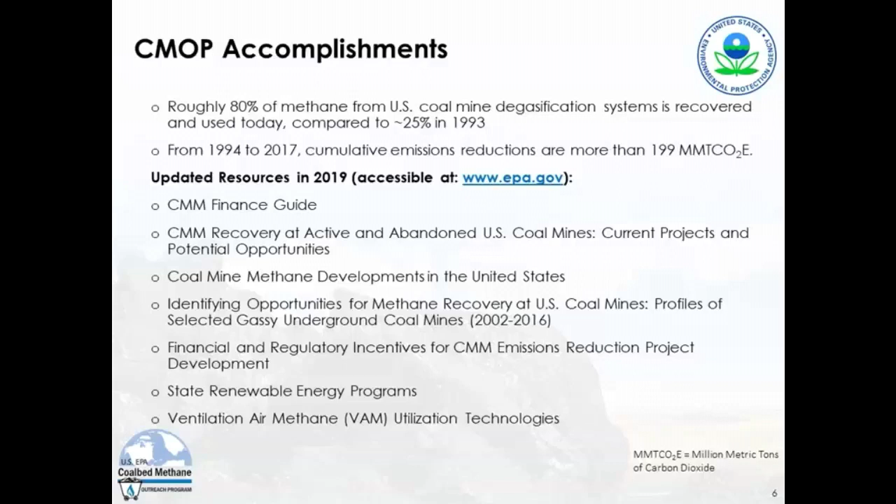The source of AMM is from abandoned mines. As mines mature and coal seams are mined out, mines might be closed or abandoned, but it's possible that even after active mining stops, the coal mine methane will continue to seep out through vent holes or natural fissures and cracks in the ground. So we'll be discussing AMM today, but please reach out to us if you have questions about any of these other sources of CMM.

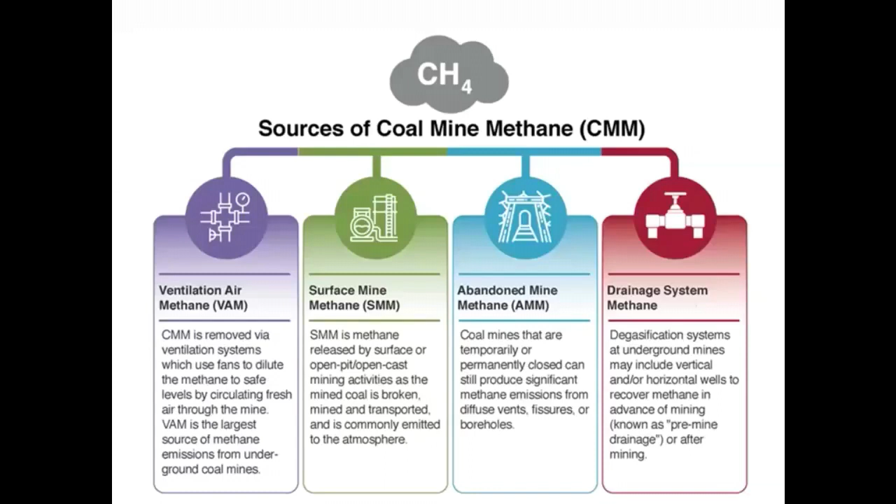Next, I'd like to introduce our first speaker. Many of you might already know Michael Cote from Ruby Canyon Engineering. He's an experienced CMM and AMM professional. He's worked with our program on various aspects of AMM emissions, estimations, and project development since 2000, almost 20 years. He was one of the principal authors of EPA's AMM emissions estimation methodology in 2004, which is a methodology used by the Intergovernmental Panel on Climate Change, or IPCC, and EPA's current national greenhouse gas inventory.

In 2005, Michael co-founded Ruby Canyon Engineering, whose services primarily target methane to energy offset projects at coal mines, landfills, and livestock operations. He's also a partner in Global Carbon Strategies, a company that developed and is currently operating an abandoned mine methane project at the West Ridge mine in Utah. He received his Bachelor of Science in Environmental Science and Management from Colorado Mesa University in 1997. Thank you, Mike.

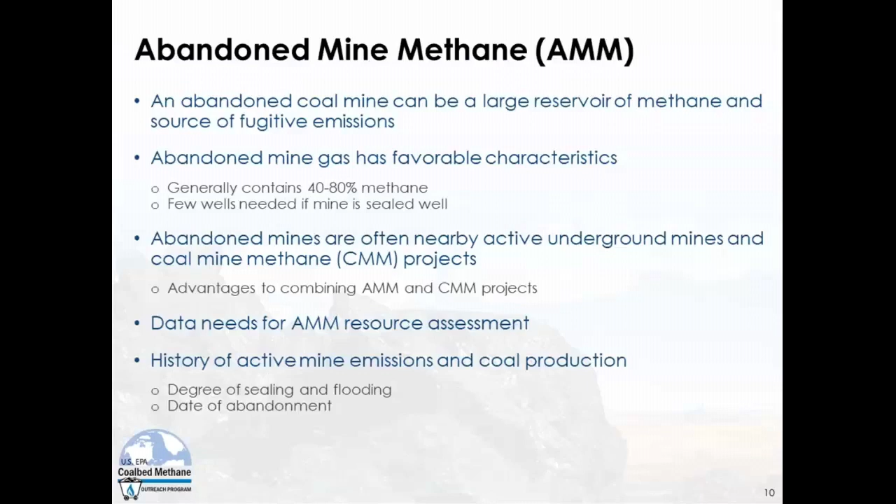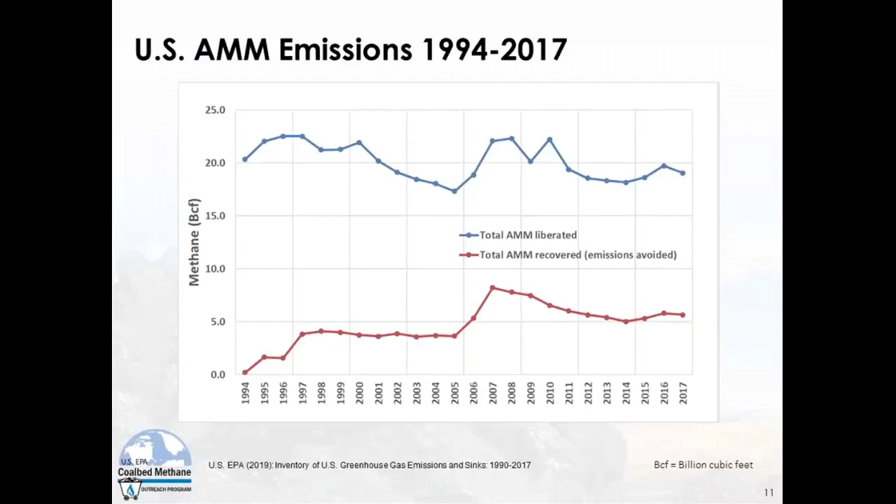There's a history of U.S. AMM emissions since 1994. You can see here that the resource has ranged somewhere between 18 and 23 BCF, looking at the top blue line. It's been about 18 BCF for the past 5 or 6 years. Similarly, the recovery operations in the red line below have been around 6 BCF of recovery.

There actually are about 10,000 abandoned underground mines in the U.S., but as you know, many of the coal mines in the U.S. are not gassy. And so we're really just focused on a subset of that population, just the gassy mines. And so currently there's maybe close to 550 abandoned mines in the U.S. right now that are in the database and are included in the AMM inventory that the EPA conducts.

And if we look at that, I divided it into thirds, and the top third of 6 BCF of recovery is currently going on from 45 mines, and it's actually 20 projects, so many of the projects have 2 or 3 mines associated with them. This one photo that you see here, the Corinth project in Illinois, has more than a dozen mines associated with it.

EPA did a study a couple of years ago to try to high grade the remaining mines, and as we'll see later, probably about the top 100 mines would account for the next 6 BCF of gas, and then finally the bottom tier 6 BCF is probably spread across almost 400 mines or so. So the economic viability of that will be very site specific, depending on the proximity to an end user, or if it's co-located with active mines, then it can supplement.

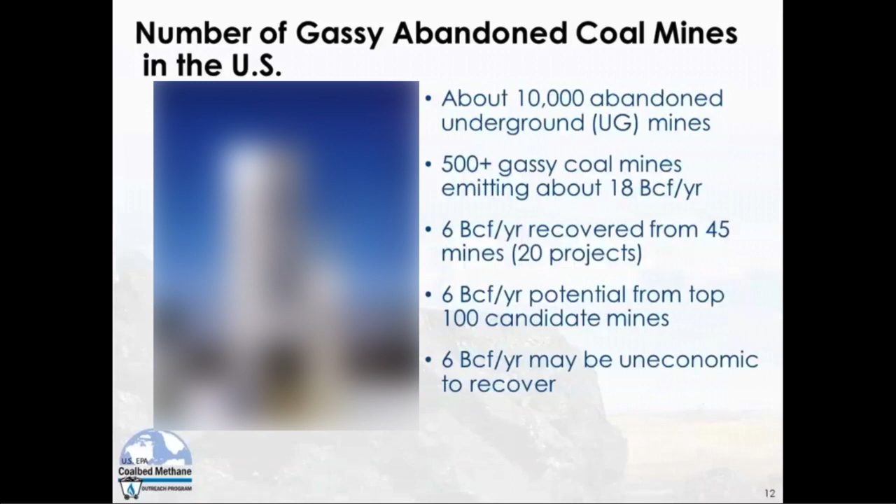Taking another look at the utilization from those 45 mines where methane is currently being recovered. Gas pipeline sales by far represents about 3/4 of the utilization. I think what we've seen is a lot of coal mine methane pipeline projects that have transitioned to AMM. As I mentioned earlier, in Appalachia, that has been the case. We have one big power project operating right now, but it actually accounts for 5 mines. And also, we've seen in the past several of the projects have sort of flip-flopped between gas sales and electric power, depending on the year and the time.

And finally, industrial end use, direct use. We have a couple of projects, and there may be more of these. Sometimes the very small-scale industrial use projects don't show up on the radar. And so you can see that while flaring is sometimes associated with these projects, all of these mines have end utilization.

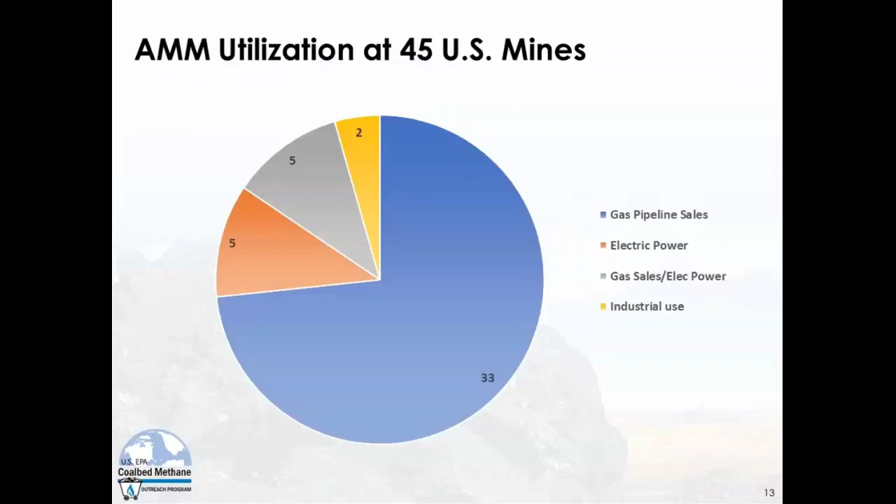Here's a U.S. map, just identifying the mines that we consider to be at least worth a look at, the ones that are estimated to be over 200 MCF a day. We consider that kind of a minimum level of economic viability. And you can see here there's several clusters. Appalachia is the primary spot. Northern Appalachia, there in southwest Pennsylvania, is a rather good spot. You can see a lot of identified sites there. Central Appalachia as well. The Pocahontas Basin also has a large number of mines concentrated there.

Other areas further west, you can see southern Illinois and right on the Indiana border. There is a collection of mines in the Herrin and Springfield seams there that have proven to be very viable. And then you can see in the west, there's a few mines in Colorado and Utah.

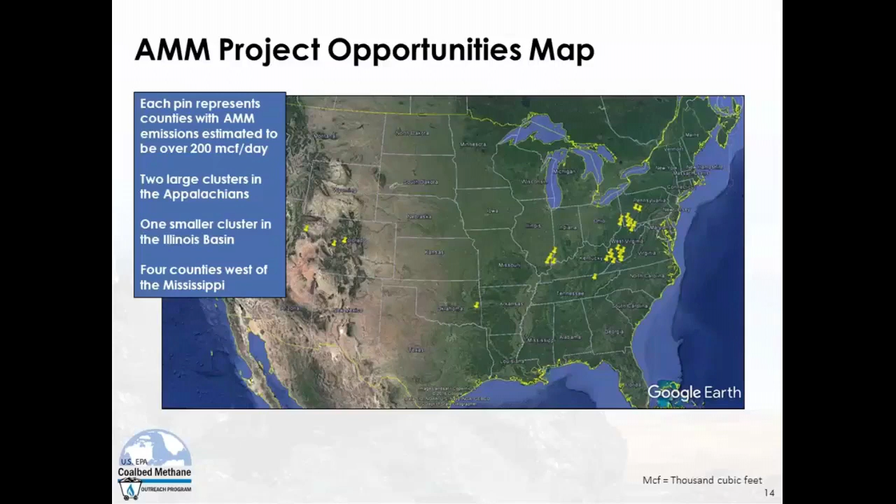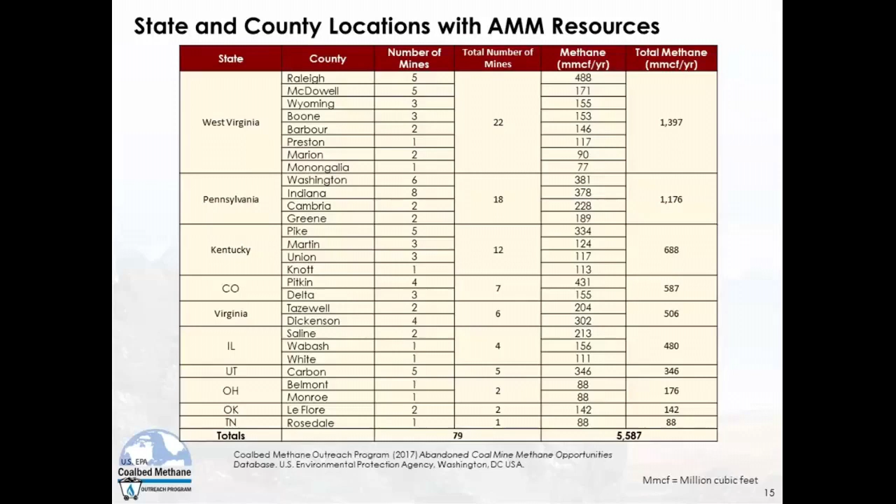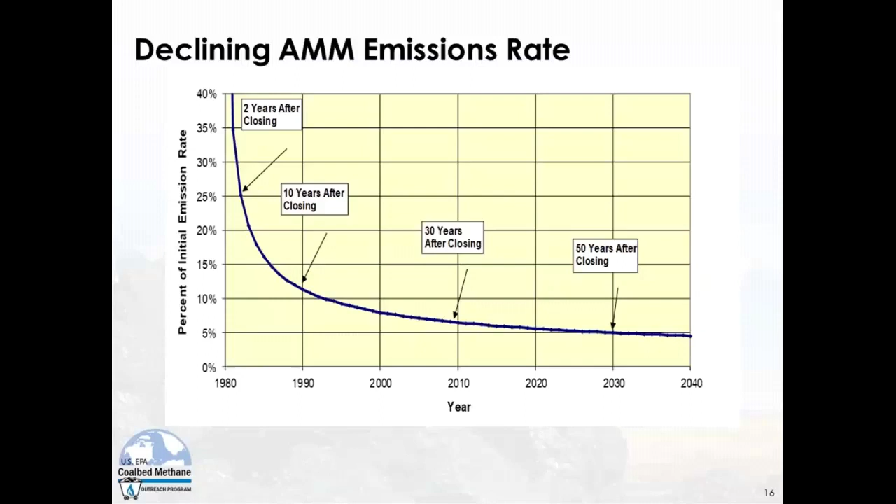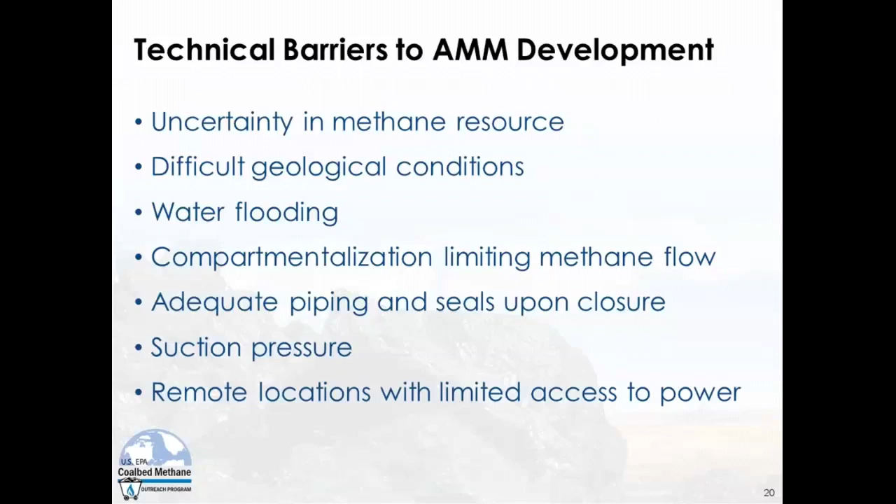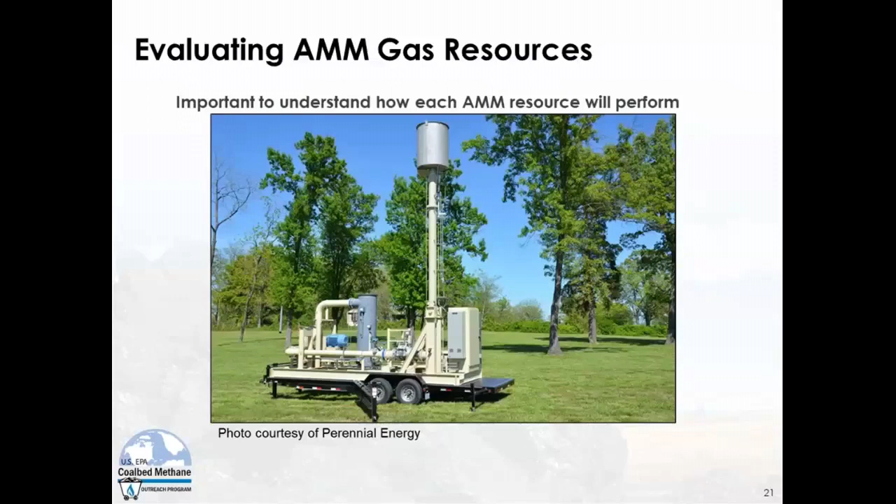Well, evaluating the decline curve is one thing that sort of gets you started, but really evaluating the resource in the field is a much better way to go to understand how the mine behaves. And so getting some kind of a temporary flare and blower to go on some existing wells, if they're there, helps a lot in understanding the behavior of the mine. So flow testing, pressure testing, flowing the mine and shutting it in and watching pressure build up. There's a variety of ways that can help an engineer do a better gas resource analysis.

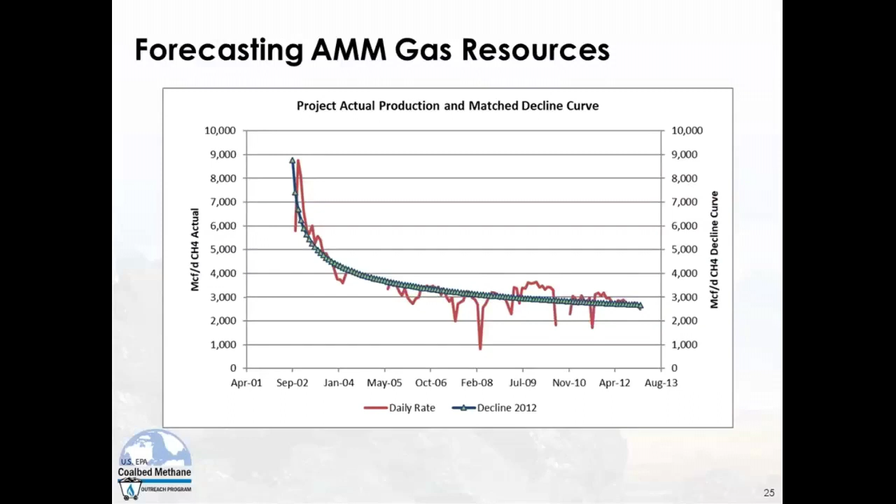When you compare abandoned mine projects to CMM projects, you have to keep in mind that the size and scale is quite different. We're talking about much smaller projects that are 10 to 25% of the size of a CMM project. It's something to take into consideration from the outset. There's nothing you can do technically to overcome this. Utilization technologies are pretty much the same because we're talking about medium quality gas.

One of the advantages of abandoned mine projects is that you're not having to interface with the coal mine itself. The activities of coal mines, in terms of the amount of gas that they're emitting from gob wells and other kinds of wells, are all based on safety considerations and not on delivering a certain amount of gas to your project for economic reasons.

Gas ownership can change after a mine is abandoned. A coal mine may be able to operate a coal mine methane project with or without a gas lease, depending on the state and the location that you're at.

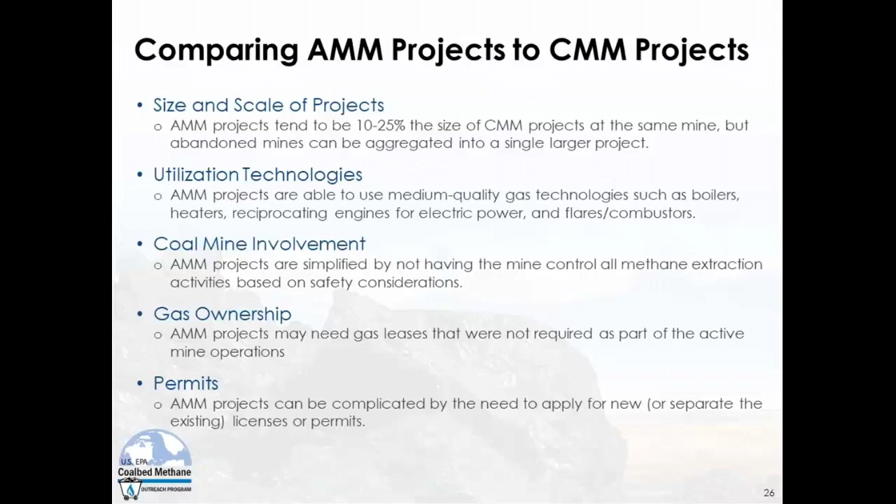Whereas if you're in an abandoned mine situation, the gas lease will be necessary. Also, permitting is similar. A lot of times the coal mines will have all of their permits under one umbrella permit, and they're able to do things with blowers and satellite sites. When you go to apply for your permit for your one location, you'll find that the blowers and IC engines will have some NOx and CO situations, so permitting is not a simple step, and this should not be overlooked as it could be quite costly.

So I guess in summary, what we're showing is that AMM projects offer a little different set of opportunities as well as some different challenges than CMM projects. And one thing that we didn't talk about too much is that preparing an active mine for methane extraction can be quite beneficial. Depending on how compartmentalized the mine is or what a mine can do, thinking about helping out methane extraction once they leave can be very important.

So if you're in early and you're cooperating with the mine right at that time, that's definitely a consideration to have. Also, performing some kind of resource evaluation at the beginning of the project and throughout the project, and updating that, is really important to understanding the behavior of your mine.

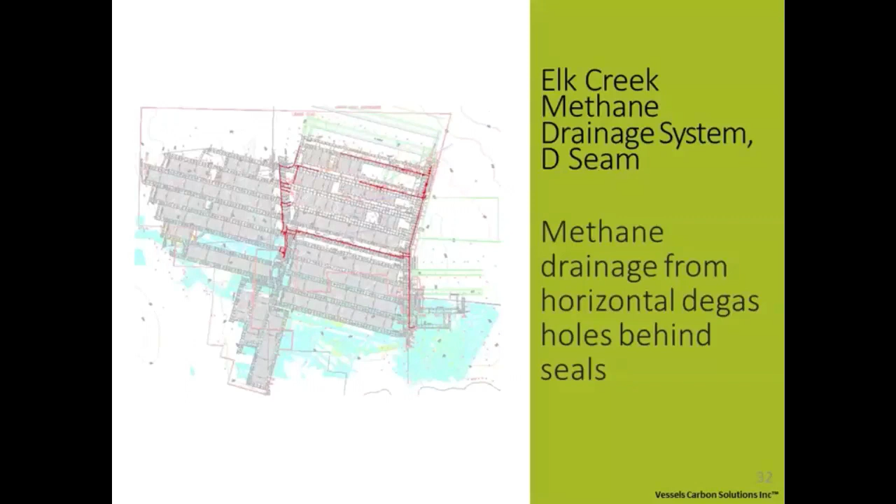They are currently closed. This is just a picture of the methane drainage system, and we are attempting to collect methane from more than one point in that drainage system, but currently we are only able to collect from one of the 2 points we'd like to, and I'll talk a little more about that later.

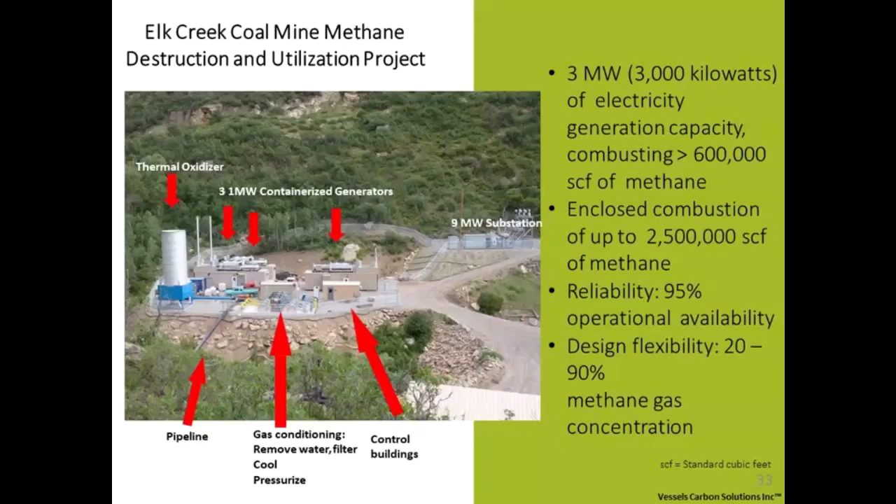This is a picture of our facility. It's actually quite small. We have 3 gen sets that can each generate 1 megawatt of electricity, and then we have a large thermal oxidizer. And the thermal oxidizer is currently running intermittently because we are at a point in production and along the decline curve where we're no longer running full time.

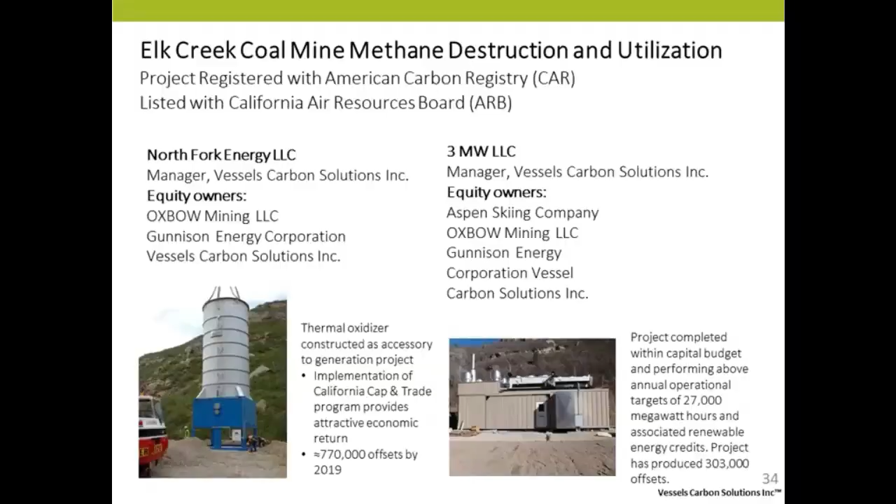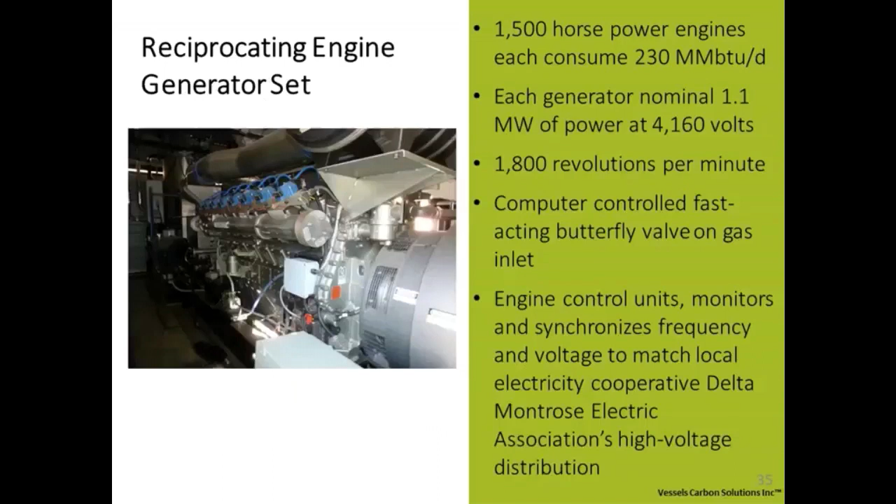The project scoping required an enormous amount of partnerships with different parties, and also required working with carbon registries so that we could produce carbon offsets. Currently, our thermal oxidizer has produced over 700,000 offsets, and the generators have produced over 300,000. The engines are pretty basic standard technologies, and they're able to run off a very low purity of methane.

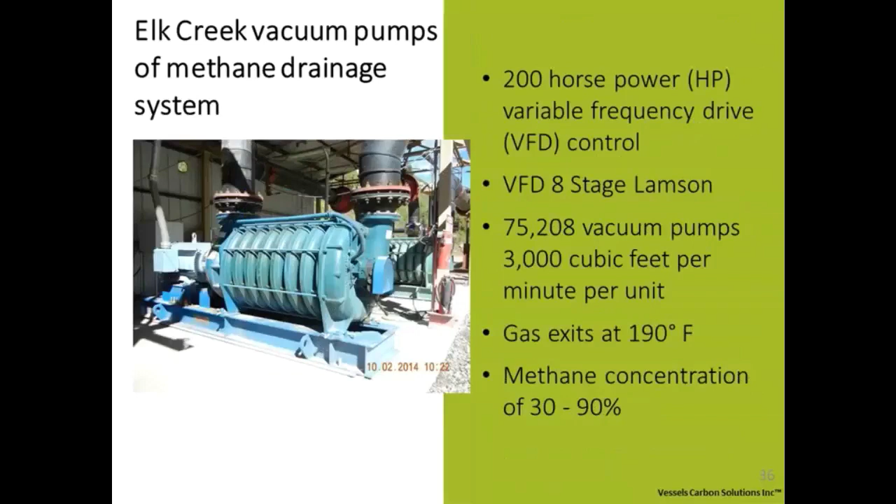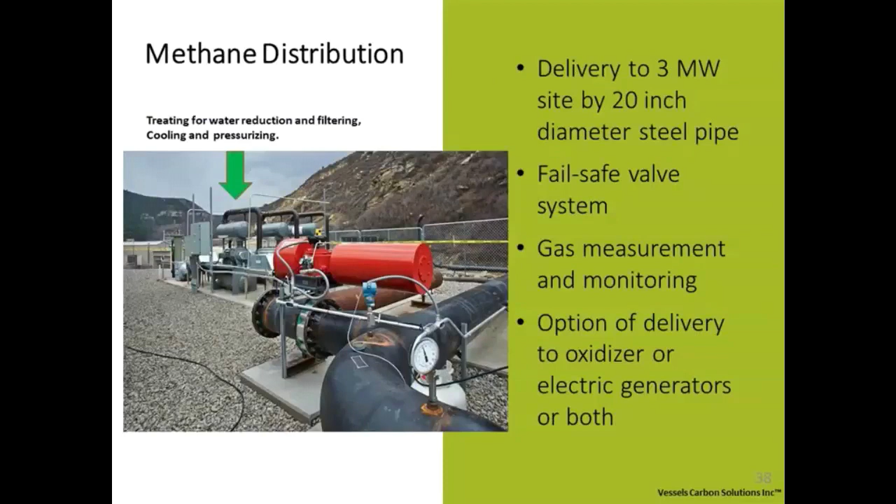This is the compressor system where we get the methane out of the mine, and it is transported across a small ravine to our facility through a pipeline. When it reaches our facility, we have some pretty nominal processes to clean the gas. We knock some of the heavy particulates out of the gas flow, and then we also knock some moisture out. However, gas that goes to the flare does not need any of this treatment.

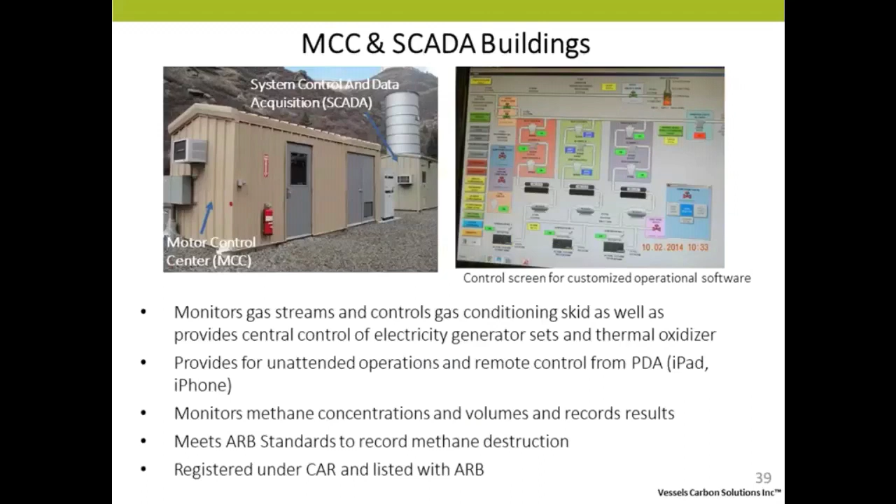The flared gas and the gas for the generators have to be managed by a sophisticated SCADA system, which stands for System Control and Data Acquisition. And this is how we make sure that we are also measuring our gas content and flow so we can secure carbon offsets.

Unfortunately, we're not able to produce the full amount of methane as indicated by the decline curve that Michael mentioned earlier. And the problem is we are sucking too much air in from atmosphere. The reason why we know this is because we've detected oxygen in the gas streams, and oxygen bonds with coal to become CO2 in a very short period of time.

So when we're detecting oxygen coming all the way to our facility, that means that there's a very large amount of oxygen coming in from the atmosphere, so much so that some of the oxygen is still reaching our facility, and this is preventing us from operating at full capacity.

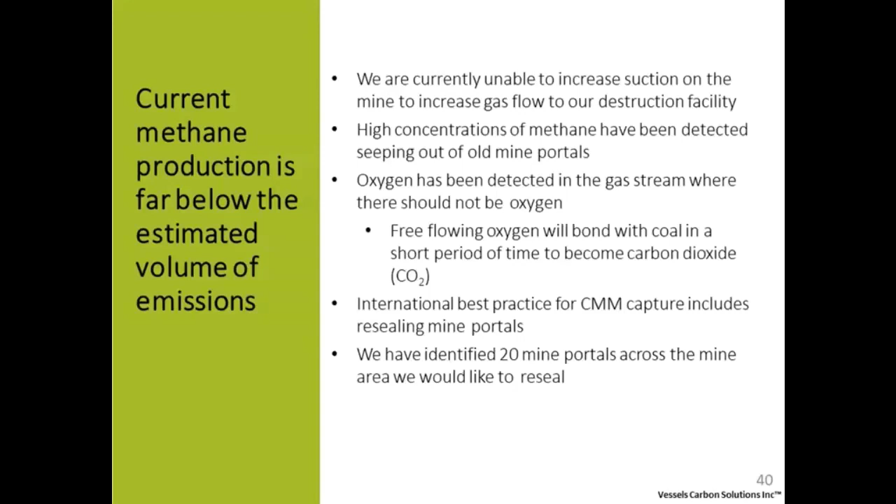It is our opinion that we will have to seal a number of mine shafts if we want to extend the project to its full capacity, and there are at least 20 locations that are possible places for the gas to be either seeping out of the mine or oxygen seeping into the mine. And both of those are contributing to the fact that we cannot flare the gas.

And in particular, I want to mention Jim Cooper, who was the president of the mine and who was a strong proponent for us in communicating to their corporate management the need, or at least the benefits, of capturing coal mine methane.

So as Michael said, it's best to attempt to get into the mine when it's active. There's a lot of advantages to that. In order to do that, you have to promise not to interfere with any mining operations, and you need to demonstrate the benefits you can bring to their project, which includes destroying volatile organic compounds, which are regulated, even though methane itself is not. And we also provide a small revenue stream for the mine. It's very small, but it's there.

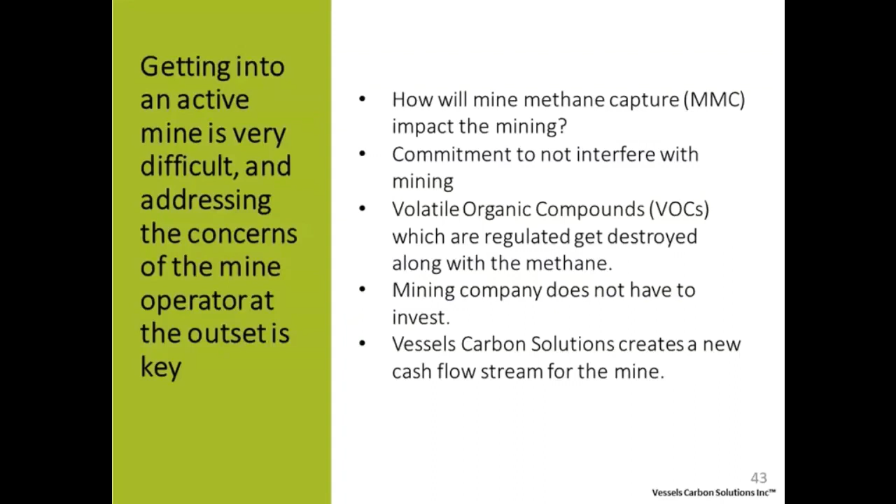And so the local support and partnerships were critical to getting this project off the ground. And in particular, Randy Udall was a very important advocate, and he was probably one of the most instrumental people in pulling the different parties together.

The other important element, of course, was making the project profitable, and that was entirely due to California's cap and trade system. The cap and trade system is absolutely a fantastic way to monetize coal mine methane.

Unfortunately, what didn't work in terms of getting the expansion of coal mine methane destruction was renewable energy. And in both Colorado and Pennsylvania, where we've operated, they have renewable energy programs that really did not lead to further electrical generation. And eventually in Pennsylvania, we shut down our electrical generation, and we only flare gas in Pennsylvania.

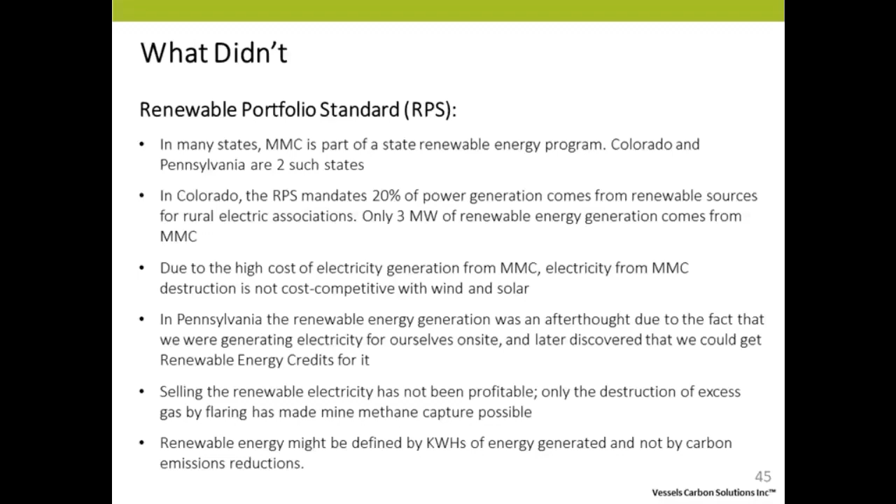It is important to note that electrical generation from coal mine methane is much more expensive than wind and solar. And so that's another weakness of renewable energy, since it values mostly the cost of electricity over the benefits to the environment, whereas cap and trade recognizes the benefits to the environment over anything else.

We also ran into an enormous number of regulatory constraints. Currently, there's no framework in the states that we operate in to mitigate methane. So you have to permit through more traditional gas production sources, which are just not appropriate for coal mine methane destruction. We've also attempted to permit under the mining divisions in various regulatory frameworks, and that has not been helpful.

We're currently trying to bridge the gap between mining and natural gas regulators and see if together we can figure out how to increase the capture and destruction of coal mine methane in Colorado.

The BLM, who's a massive landowner in the state of Colorado in particular, but also in a number of states out west, are important parties here because they can either issue or not issue permits to work on their land. And while they have indicated they may be willing to permit methane destruction as simply methane destruction and not anything else, they have insisted on getting state regulators to agree to that first.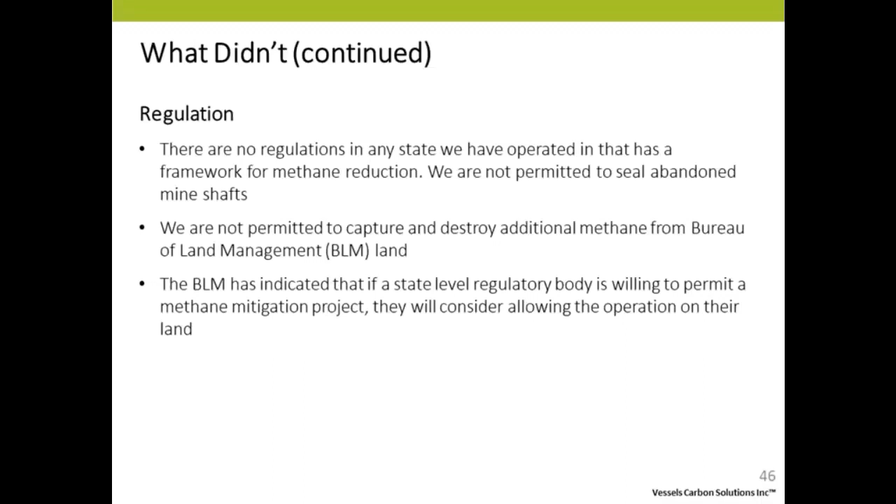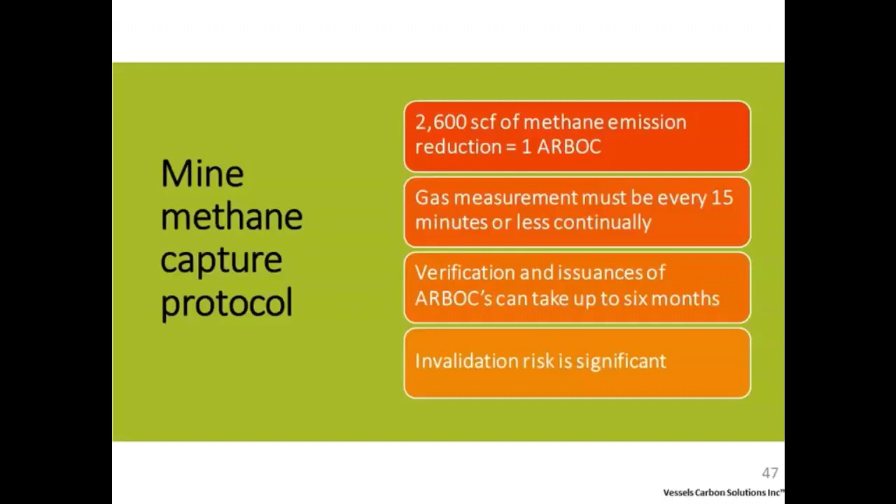I have included a little bit about the mine methane capture protocol because that is how we get our carbon offsets, which is, again, the main source of income for our company. Currently, California, Quebec, and British Columbia have a linked program for carbon offsets.

And I just wanted to finish by mentioning that there is a significant lack of knowledge and understanding about coal mine methane in America, and there is a significant amount of opposition to coal mine methane capture and destruction. So it will require a significant amount of work to educate whoever needs to be involved, and it requires an enormous amount of repetition because you just have to keep returning and telling the same story over and over again until people start to get it. And that concludes my sort of lessons learned on coal mine methane and abandoned mine methane in particular.

Thank you, Evan, for sharing your experiences with us. It's really helpful to hear your best practices, and hopefully we can work together, everyone on the line and the CMOP program, to continue to address some of the barriers that you mentioned and challenges associated with AMM development.